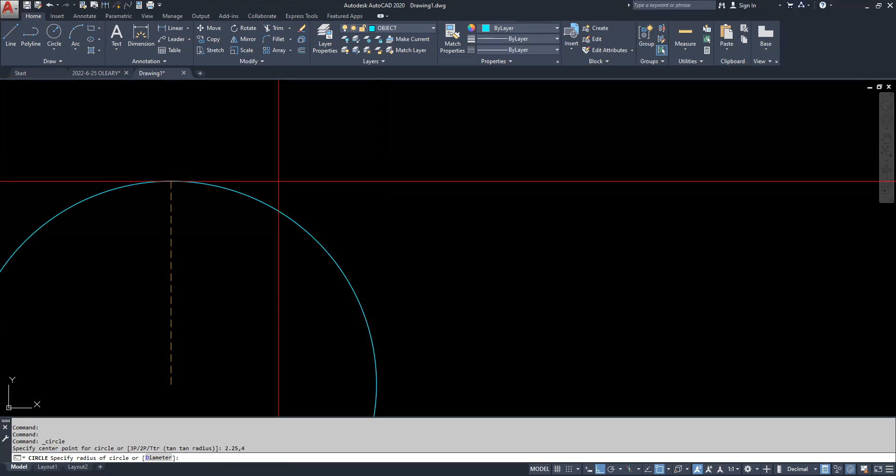And at the command line, it asks us to specify the center point for the circle. The instruction says it was 2.25, 4. Enter. So now we have the center point of our circle. We just need to enter the radius or diameter. It told us the diameter was 1, but the command line is asking us for the radius.

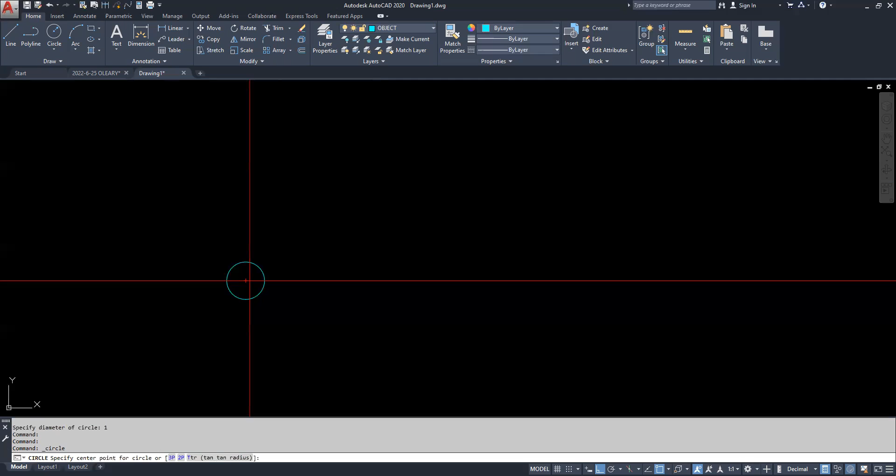So we have 2 options. We can click D, enter, and enter the diameter, or we could do the math in our head. I'm going to go D, enter, and the diameter is 1, enter. So we got the first circle on the screen. After that circle, there's a circle around it with a radius of 1. I'm going to pick the circle command again, find the middle of that circle, the center point, and I'm going to do a radius of 1.

From that point, there's 2 other circles that are 6.62 units away. So I'm going to copy both circles. Copy, pick both the circles, hit enter. Now, you could just pick any random spot on the screen. So with my crosshairs, I'll pick a spot on the screen. And now I can move these circles. It's kind of like an invisible stick attached to them. As I push back and forth, it goes back and forth.

I'm sorry? I didn't know that. Okay.

Copy, select both the circles, enter, pick any point on the screen. Now, if you have F8 on, it's going to go straight, but if you turn F8 off, you can go in any direction. So it all depends on if you just want to randomly copy it somewhere or do you want to keep it in alignment. So F8 will keep it straight.

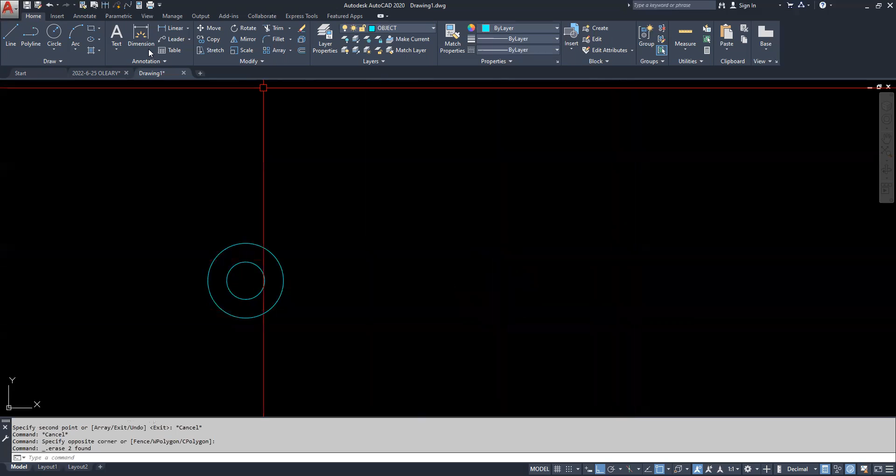I was in the copy command, and it asked me how far do I want to move it, and then I type 6.62 and hit enter. I'll repeat the process. Copy, select the objects, hit enter, pick any random spot on the screen, push in the direction you want to go, and then enter the number 6.62, enter. Then hit escape.

Now I'm going to change the size of the circles. So I'm going to click on one of them. If you have your quick properties turned on, the quick properties box will pop up, which is very handy. If it's not on, look at your status bar and make sure this box, it's a rectangle with some lines, almost represents a calculator or something. Make sure that's on. That's not going to be on by default on AutoCAD when you first open it.

So you're going to have to click on this customization right here, these 3 lines, and make sure quick properties has a check mark next to it. So that check mark's not going to turn it on or off, but it's going to make it show up on the status bar. So once it's on the status bar, make sure it's checked right here. It's highlighted blue. So that way, when you click on an item, you get your quick properties box.

Now, oftentimes when you first start it, the quick properties box is going to be right where you're working, which is not the best idea. So what you can do is go onto this gray bar right here and right click, and you get this pop-up menu. I'm sorry, not customize.

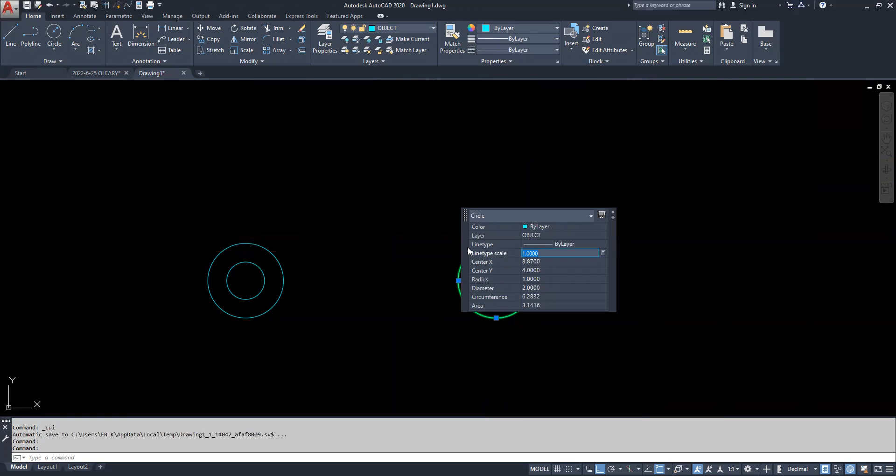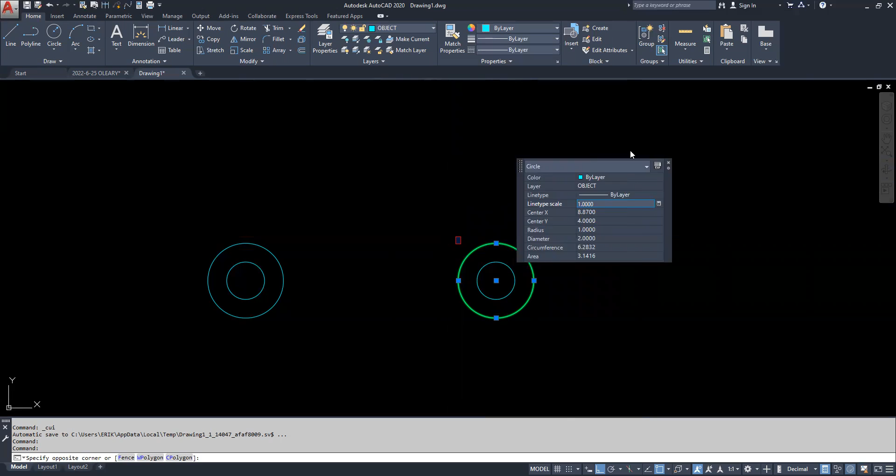Where it says location mode. Normally, by default, it's on cursor, which means it's going to be wherever the cursor is. I like to put it on static. What that means is wherever I park it, and I park it by holding the left button and dragging this around, I usually keep it up here somewhere. Wherever I park it, next time it appears, that's where it's going to appear. You might prefer it to be down here or wherever you prefer it. I prefer it up here.

Now that I click on this, my radius is 1.75. Escape. Click on the other circle, and his diameter is 1.5.

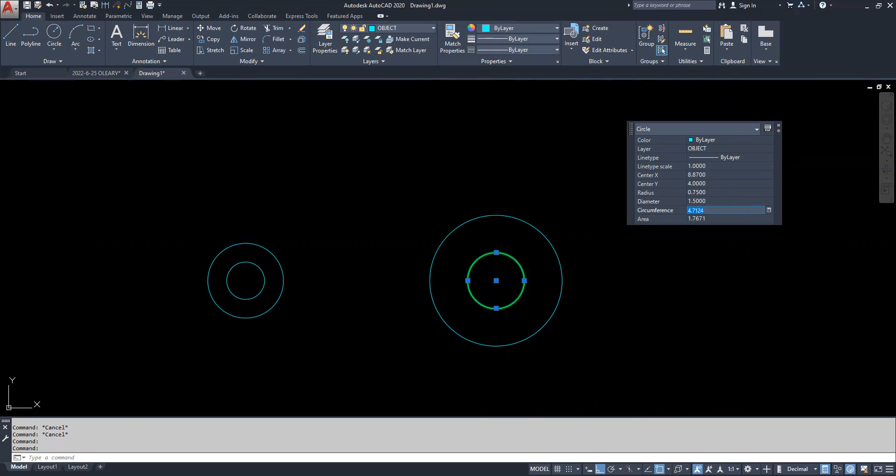So now there's 2 arcs on this object, one coming along the top and one coming along the bottom. To get these arcs, we're going to use the tangent, tangent, radius circle command. So when you pick that command, it's asking you for 2 tangent points. AutoCAD's going to do a lot of the computing for you, but help it out. Basically, the tangent point is here. If you look at your drawing, this is where the one arc turns into another arc. And basically, it ends over here, more or less.

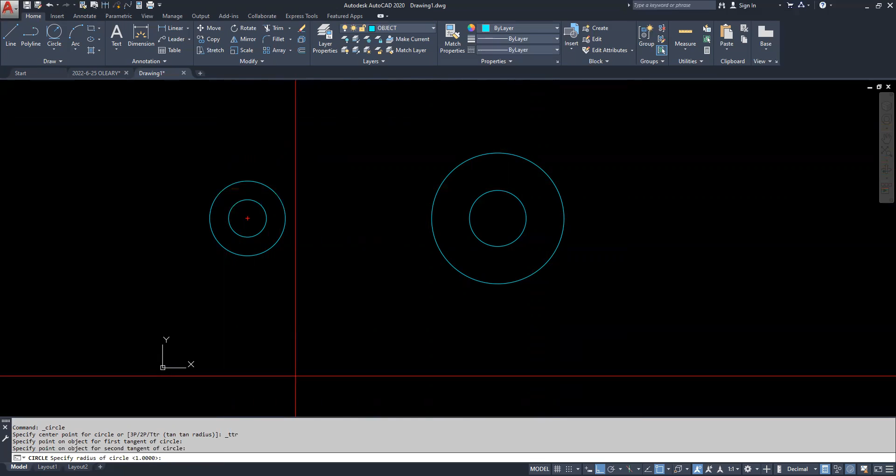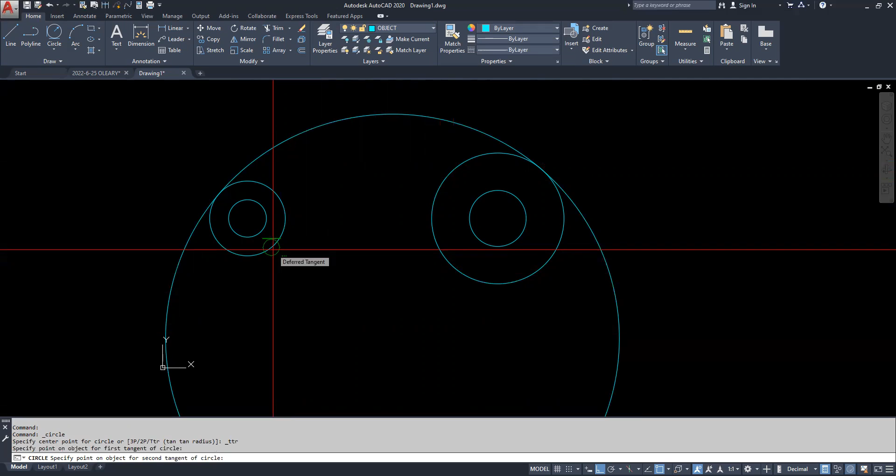The next question is, it's going to ask you for the radius. So after you pick those 2 points, type 6, enter, and there's your radius, because that's the radius that the drawing gave us. And now the same process, tangent, tangent, radius circle. Basically right here, and basically right here, you see that green symbol, the object snap symbol. And then the radius is 4.5.

So at this point, I could start to do some trimming. Take the trim command, pick this one as a knife, pick this one as a knife, hit enter, and get rid of this piece and get rid of this piece.

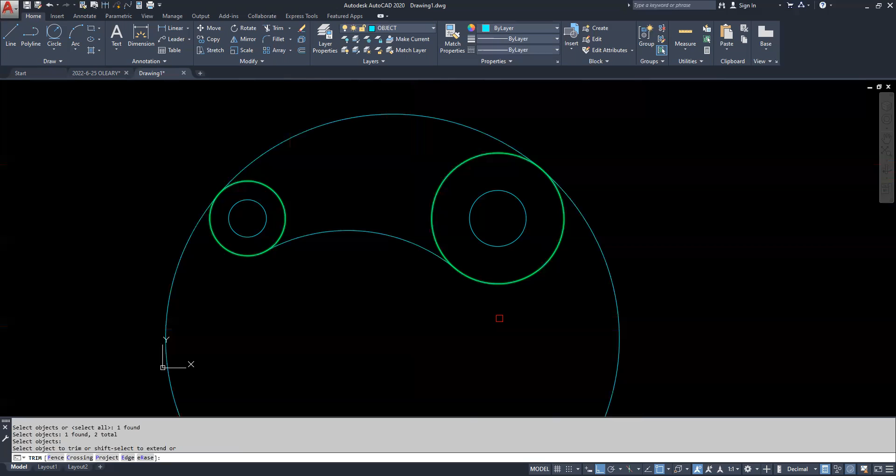After that, we can use the offset command. So the offset command is like the copy command, but what's different about it is you pick the distance first. So I'm going to pick the offset command, and it's asking us the distance. The distance is 0.625. Hit enter. So then you get what's known as the pick box, this little red square. What it wants you to do is pick an item you want to offset. I want to offset this arc.

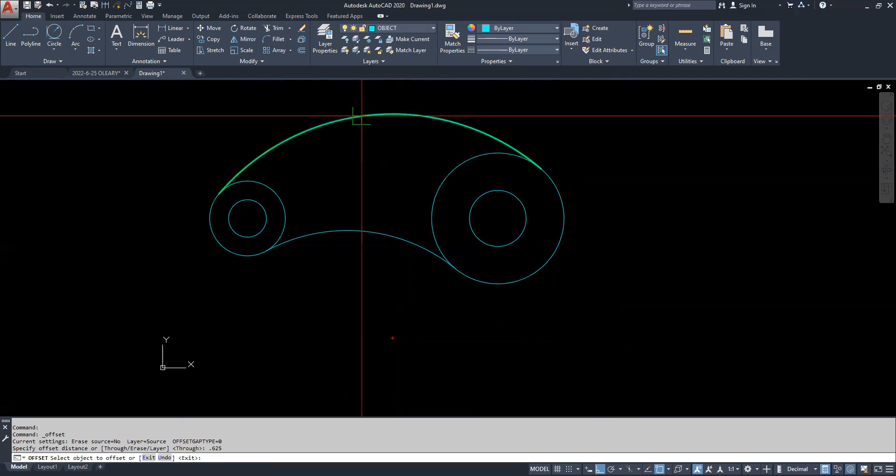Now after that, you have two options. Do you want the arc to go to the top, or do you want the arc to go down? As you move the cursor, those are the only two options. So once you have it in the location you want it, all you have to do is click the mouse. And it gets you back into the pick box. It automatically will let you do another object. And that's good because we want to do this object down here. Pick this object, move up, click. There you go. Once you have that, you can hit escape. You're back with the crosshairs.

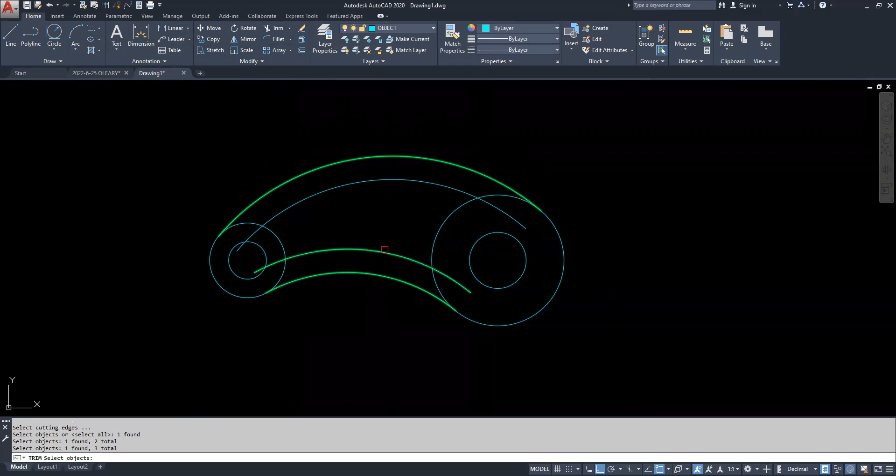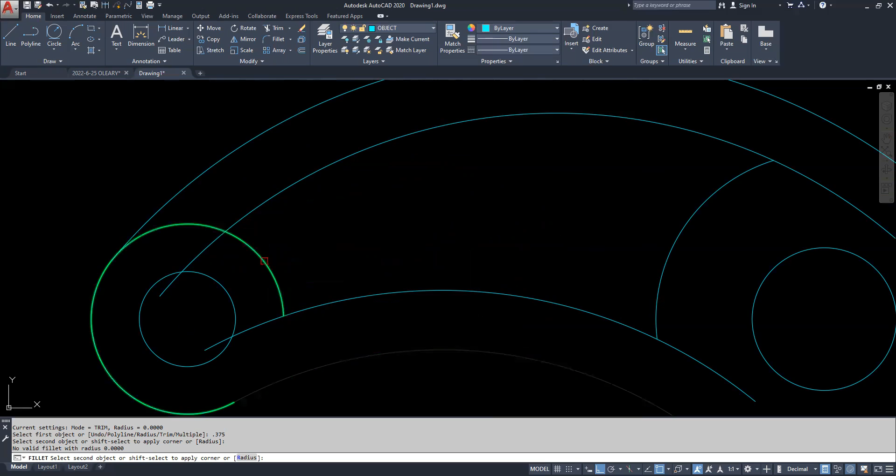Now, the next one is the fillet option. That's going to give us these nice curves in the corners. So you pick the fillet command, and you have to enter the radius. The radius is 0.375. Enter. Then you have the pick box. Pick the items you want to put a curve on. Now, all you've really got to do is make sure you pick on the part that you want to not go away. So I want this part to stay. What happened?

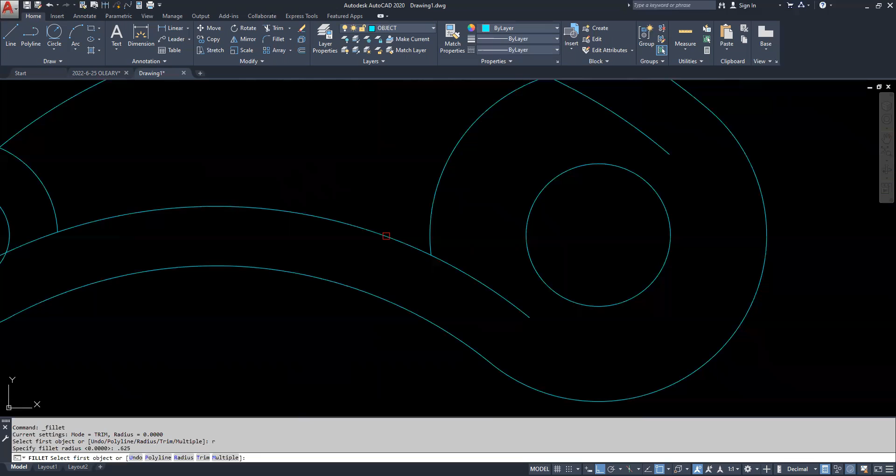Fillet, radius. I don't think I hit R for radius. 0.625, enter. So I want this part to stay. So I'm going to click over here, and I want this part to stay, so I'll click over there. You already see a preview of it. Spacebar or enter gets you back in the same command. I always say spacebar because it's a pretty easy target with your thumbs, and my thumb is always sitting on the spacebar, ready to hit it. Spacebar.

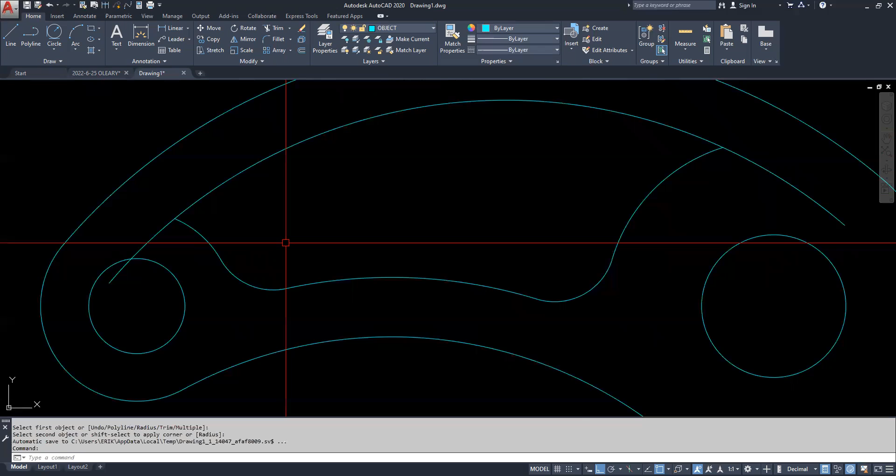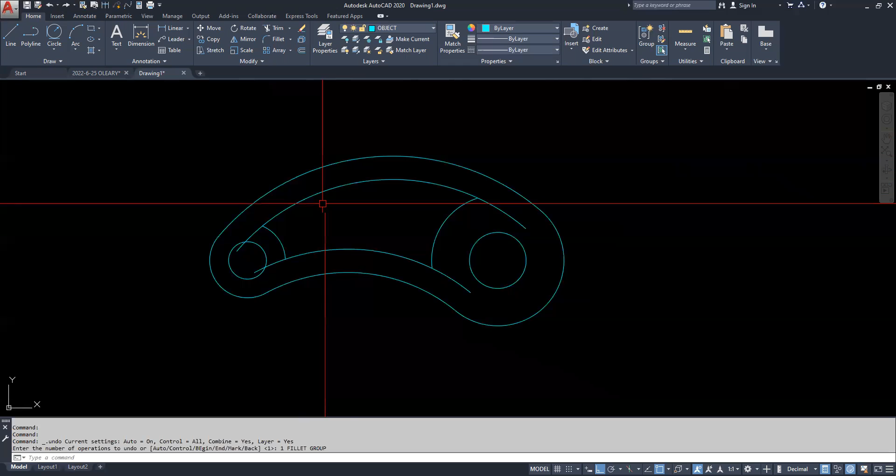Right now I'm moving very slow because I'm lecturing about it, but when I'm going, it's rapid fire. Spacebar. Click, click. Spacebar. Now, something doesn't quite jive with me right there. I think I might have entered too big of a radius. So I'm going to go back. I use the undo button, which is very handy. Sometimes you wish the undo button was in real life.

Fillet, radius, 0.375. That looks better. There you go. All right, and that's it. It's a tricky little object. It would be even trickier to draw it by hand, but with AutoCAD, you can see in a few steps it's completed. And it's quite satisfying when you do draw it.